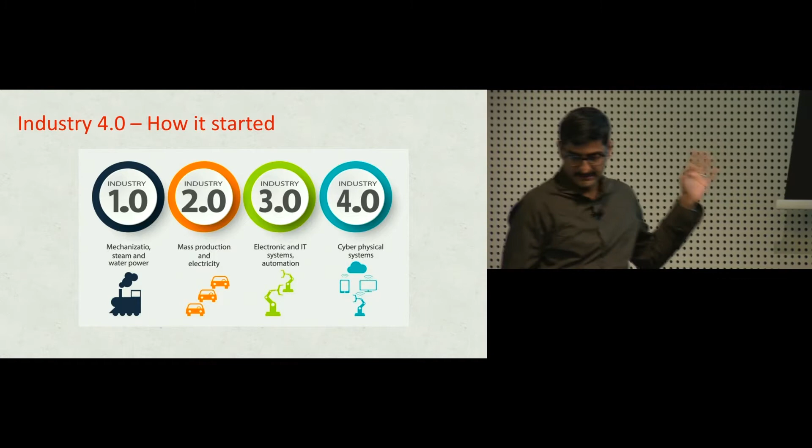Just a bit of background for some of you who may know this area, for others who may not. I work in what's called Industry 4.0. This is a term that came out from Siemens in Germany, but now it's taken over by pretty much any big manufacturing and automobile companies, and they're trying to build this all the way from 1.0 to where we are now at 4.0.

This is very relevant to all the talks you heard previously. This is thanks to digital data, getting data from every source, whether it comes from Alexa or Bing, and using this to produce more effective products. The example I normally give is: what if you can go online and order your shoes from Adidas with your name printed on the sole, and all this is done by machines talking to each other.

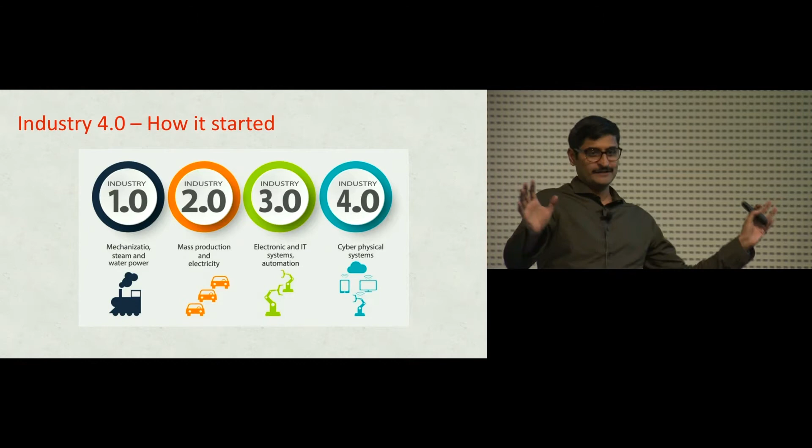There's no humans in between, right? That's kind of what Industry 4.0 is. We are still in the automation area, where you need someone to program the machines, tell it that's the sole, that's the color, you need to do that, and the machine starts to paint it. How do we then start connecting all this together?

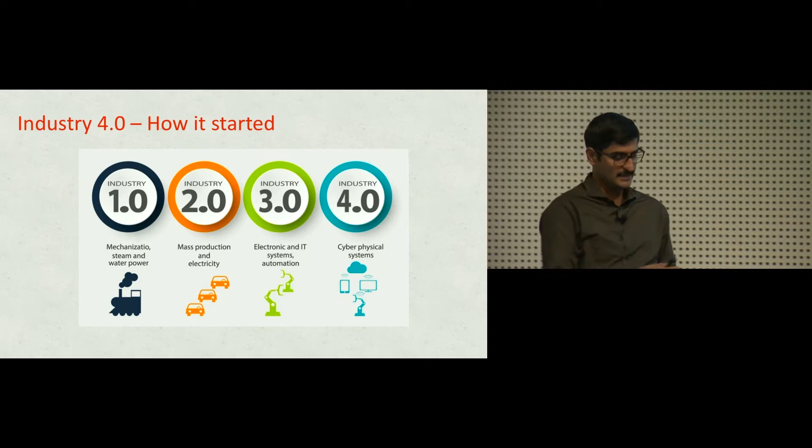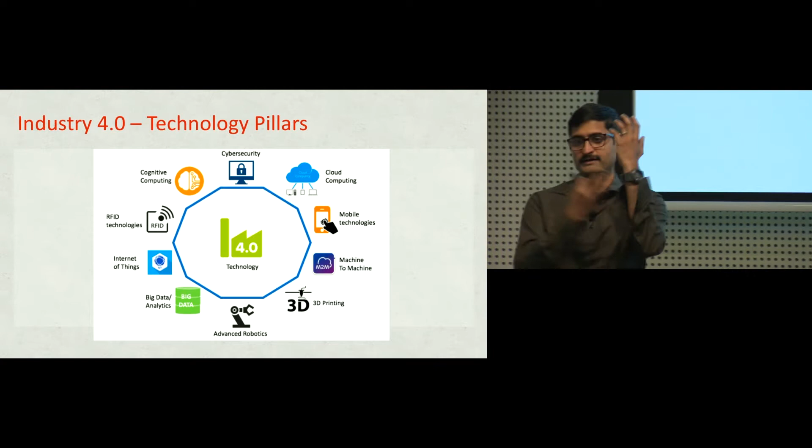What are all the technology pillars under this? You're probably familiar with everything. My area is more around the Internet of Things. This is about not just sensors, but your wearables, your smartphones, social media, data sources in digital form that we can use to generate insights in order to deliver an Industry 4.0 solution.

That leads me to what is called the Industrial Internet of Things, which is one of the key pillars of Industry 4.0. I picked this up because it's very important: these are numbers of how data from sensors, if used to produce 1% optimization, could lead to about $30 billion worth of fuel saved. In agriculture sector, it's about $2 billion.

I'm sure you're all familiar with smart agriculture, putting sensors on the field, understanding how the crop grows, identifying when to harvest. That's the age we are in. Yes, we have farmers, and they are the best who have the experience, but these technologies are helping them do these things much better and more effectively, thanks to changes in climate and a whole other factors.

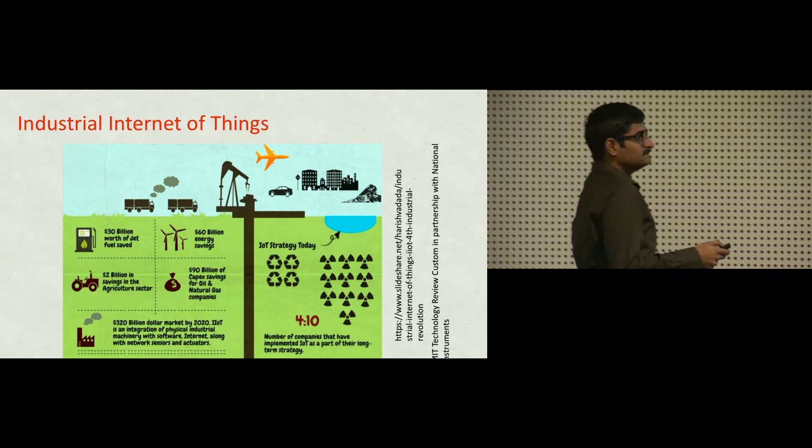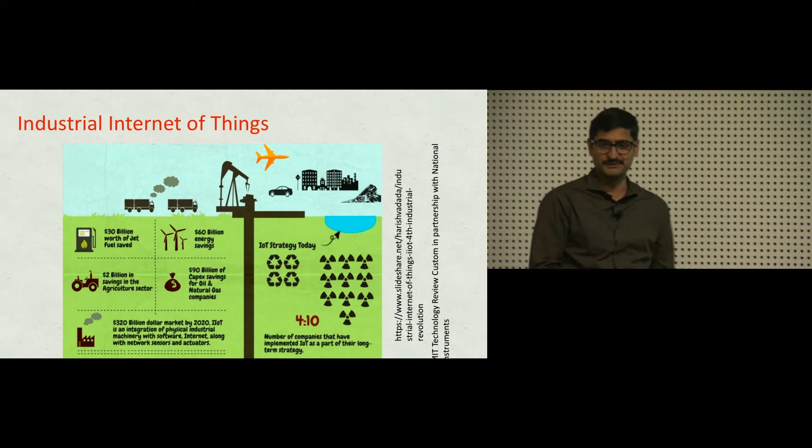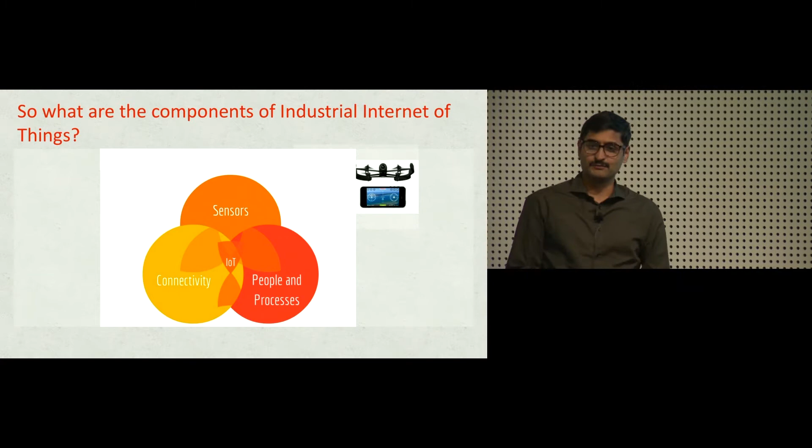In my view, some of the components of this, when we say IoT, the most common thing that comes to everyone's mind is sensors. But having worked with industry, what I found out is that when you want to have IoT or Industry 4.0, people and processes are very important.

Now, people coming from search or web searches, you all look for your users. For me, from a manufacturing point of view, people determine the processes of how to produce something. So before I do the cool machine learning and building models, I first need to understand the context of how this data is being produced. How do I fit the data?

Most industries in Australia, when they come to us, the first thing they say is, I have collected a lot of data, can you guys with some smarts try to do some analysis for us. Then we go to look at the data and we say, unfortunately half the data you have collected is useless because you've just been collecting data, you do not know how to use it.

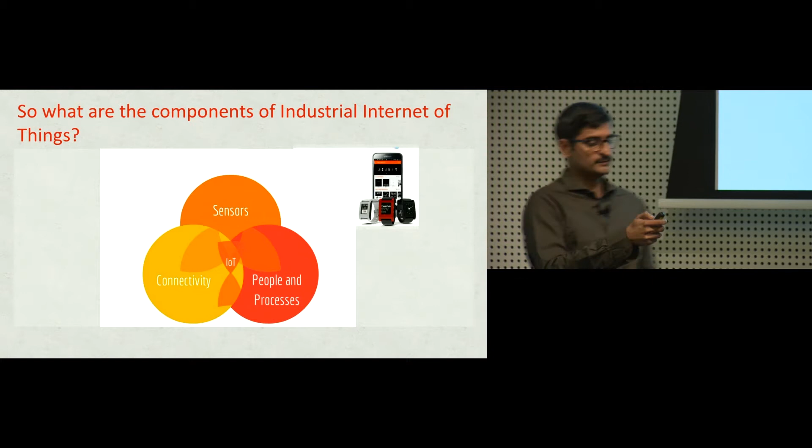We had to go back to the fundamentals: what does the data mean for you? What are the business problems where people are connected? Then comes the technology factor. I use this slide to motivate the fact that IoT is not just about getting some sensors, putting it in the plant, collecting data, doing some analysis, and you get a result. That's not IoT, that's one notion of it. Clearly it doesn't work in the real world in industry.

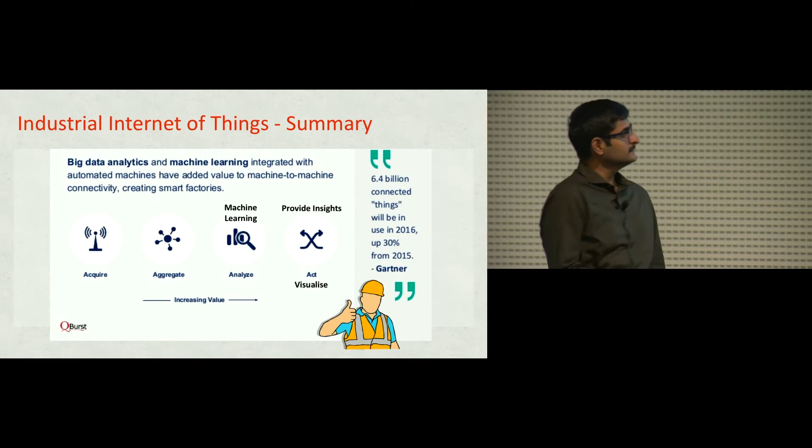So sort of the person in between all this acquiring data and aggregation. This was a study done by Cisco with Black & Decker in the US. When they went into the manufacturing plant and started looking at what are the top important things, as you can see, the actual sensors are the least important.

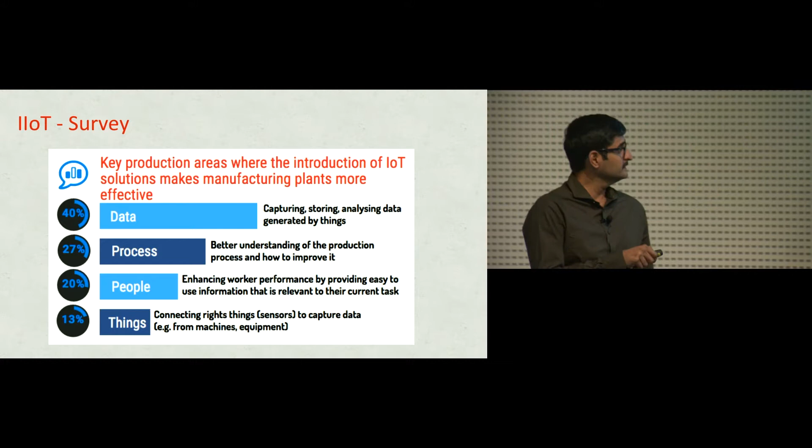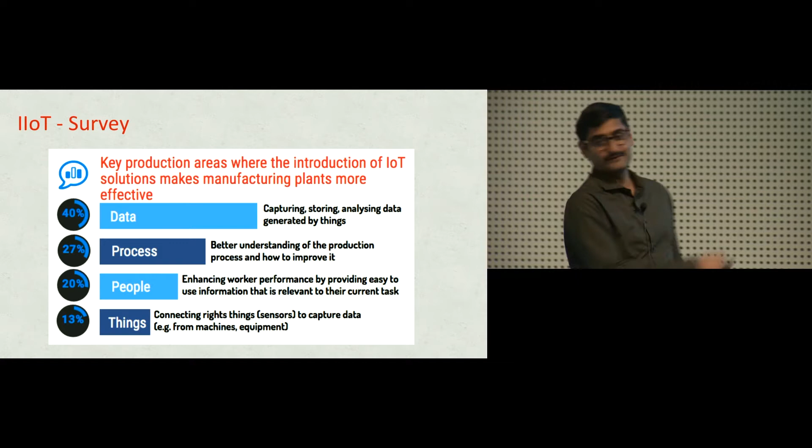Before working for Swinburne, I used to work for a company called CSIRO, Australia's premier research agency, like the NSF. They used to manufacture sensors about 6 years back for agriculture. A sensor used to cost about $2,500. Today, you can buy them off eBay for about $50. That's how fast the technology has grown, thanks to Moore's law. But these parts have not really changed a lot, they're still the same. That brings me to the actual work that we did.

This work was funded by AMPC, the Australian Meat Processor Corporation. This is a research development corporation funded by its members. There are about 20 different meat processing producers in Australia. They are end-to-end, meaning some of them own the farm, so they actually grow meat. And by the way, for vegetarians, yes, there's going to be some meat stuff here, so apologies, but no blood, okay? They kind of foresee what kind of research activities they need to conduct in order to improve the industry, provide better value.

Most of the money that they get goes into more pure science - what kind of new breed I can grow, what kind of food I can deliver them. This project came out because they wanted to look for an industrial IoT solution in a meat processing plant. This was sort of led by one of the IoT lab directors in Swinburne, Professor Dimitrios, and my other team members. So we took the idea of identifying what the opportunities were.

The approach we took was very consultative. We spoke to about 10 different meat processing producers in Australia, from Brisbane, Adelaide, Sydney, and Victoria. Through that, we went into a meat processing plant, and through consultations, we identified quite a few things. So that's how a meat processing plant looks like.

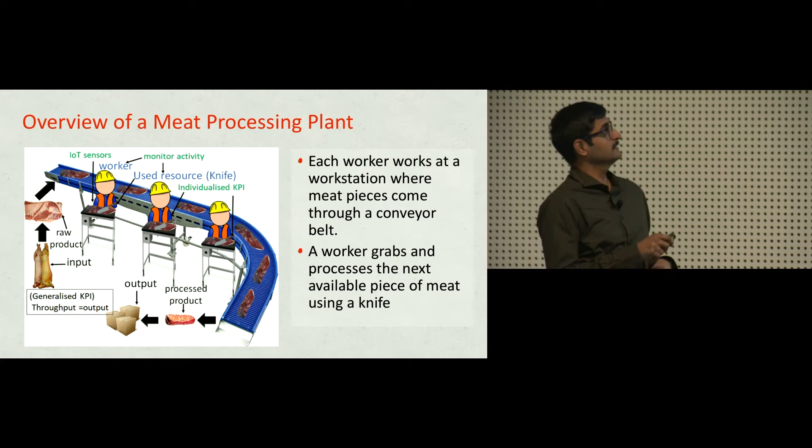Now, yeah, that's a very - I don't know how clear. I've got a real photo of it later on. But that's the level of automation they have - the best tool that they actually use is a knife. So that's a conveyor belt, and you've got meat going along. Someone takes it off onto a processing place, cuts it, slices it, removes fat, does whatever it is, and then produces a product which then goes into packing, which you actually go to your supermarket and buy.

Now, that's a very different experience to shopping in a supermarket. You get it very nice and packed. This is exactly what - now, they do have some automation technologies, things that can cut the actual carcass into different pieces based on an X-ray scan. But then the real stuff about producing the product, it's all manual.

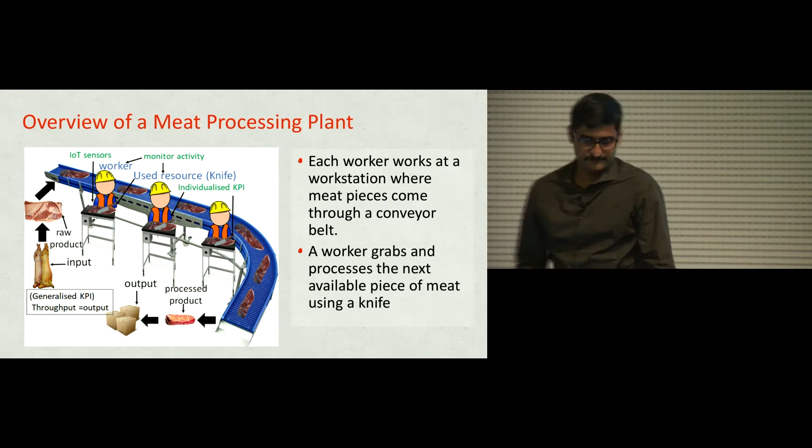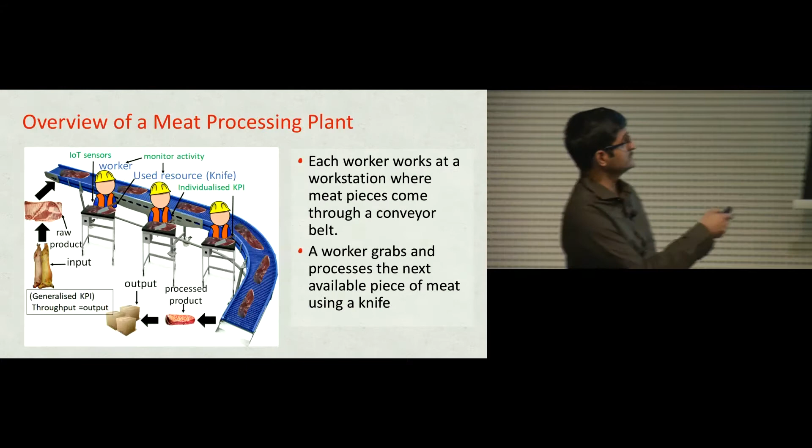So we were given the task of, given a scenario like this, the only KPIs they actually have is, I have carcasses coming in, I have products going out. Now, no one knows what's happening in between, which means today, I need to produce 500 pieces of rump steak. I need to process 1,000 pieces of carcass in order to produce that. My supervisor goes to each of these workers and says, you need to do this, get the meat, start doing it. If they don't finish work on time, let's do another extra hour of shift, or let's pass the shift on to the next person.

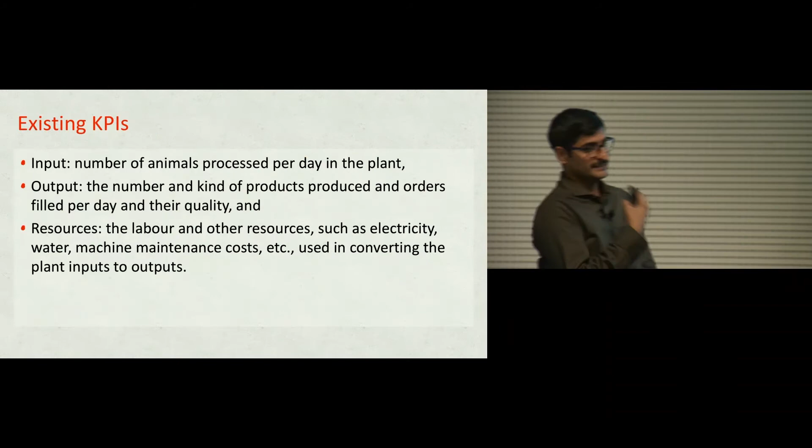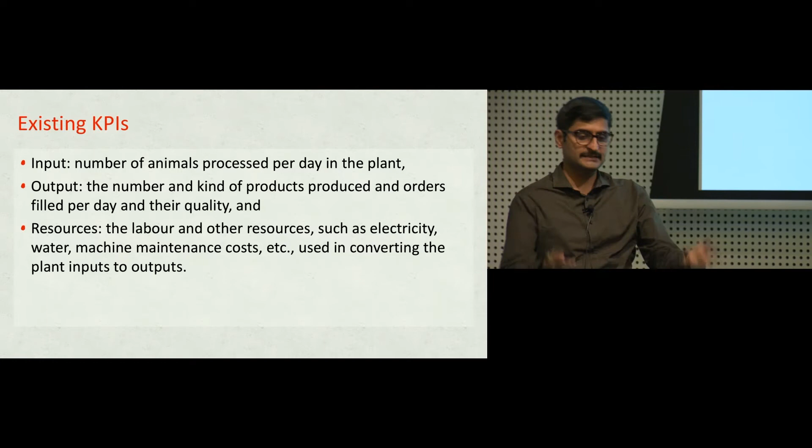And in this industry, it takes about 2 weeks for them to go back and look at any data to see if they were even meeting the quality standards. And that is one person going to 10 different machines, collecting data, putting it in an Excel sheet, and doing some analysis - and that's only the quality aspects of it. So we looked at this from a combination of consultation, our expertise in IoT, and also a bit of data science, and identified a few opportunities.

One was we challenged ourselves thinking, can we determine some sort of fine-grained KPIs? Rather than saying what goes in and what goes out, can we find out a bit more of who's doing what in between? Some of the other activities that some of you would have been aware of is what's called farm to fork. For example, go to your supermarket, buy a piece of meat, scan it on your phone.

It says exactly where the meat came from, which cow it is, which farm, which location, what did it eat. And this is getting very important these days.

You'll see work in traceability along blockchain, thanks to various sorts of disease that could get across and people could die because of that. In Melbourne, Australia, about a year back, we had a big problem with what I think was a fish-based infection.

It actually resulted in some people dying. So our work was looking at this key aspect of how do we use some sort of IoT technology to understand or provide a more fine-grained KPI.

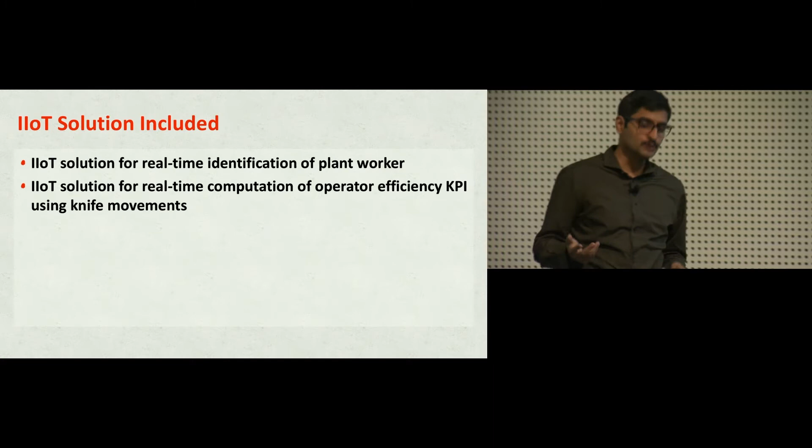So the solution we came up with: the only tool our operators in the industry use is a knife. So one guy came up and said, can you figure out if the knife is sharp or not? That's very important for them.

Because if you use a blunt knife - have any of you cooks here ever tried cutting a tomato with a blunt knife? If not, go home and try it. Just blunt it off and try cutting it.

You can actually hurt yourself if you're doing that for 6 hours. So one metric is: is it sharp? We started off with that approach, but ended up with a different objective. The only tool we had was a knife, so we were saying, how could we assess a worker's performance by the movement of the knife?

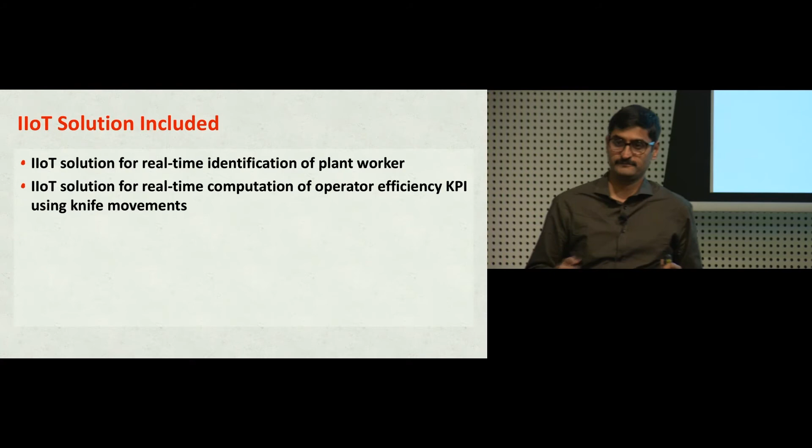Our system, we don't produce sensors, so we use off-the-shelf technologies. The sensors we used, we bought from the US from a company called MetaWear. It's about $50 US - proximity sensors, Raspberry Pis, everything off the shelf.

We built our own architecture where a worker wears this like an activity device on both hands, goes on cutting meat. We then use that to determine activity. So from a machine learning problem, it's recognizing activities - not somebody walking or sleeping, but using a knife to cut a piece of meat.

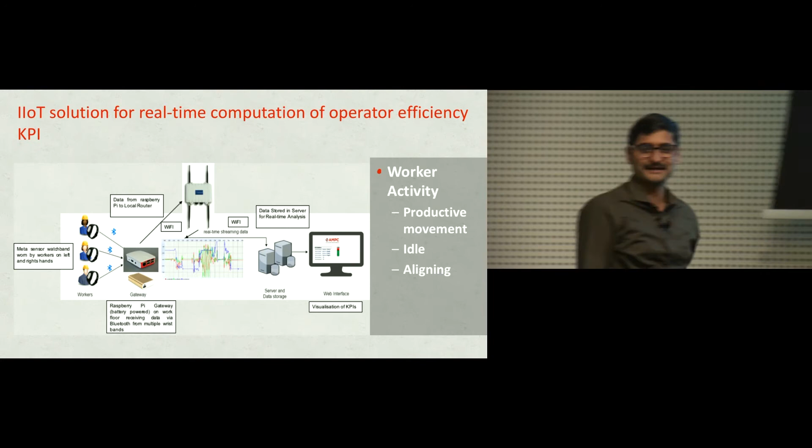This, you've probably seen much better diagrams of the architecture, but it's very straightforward. So we conducted a real trial to validate our study. Given it's research, university, limited budget, we could not go on for weeks of trial - this was about 2 days.

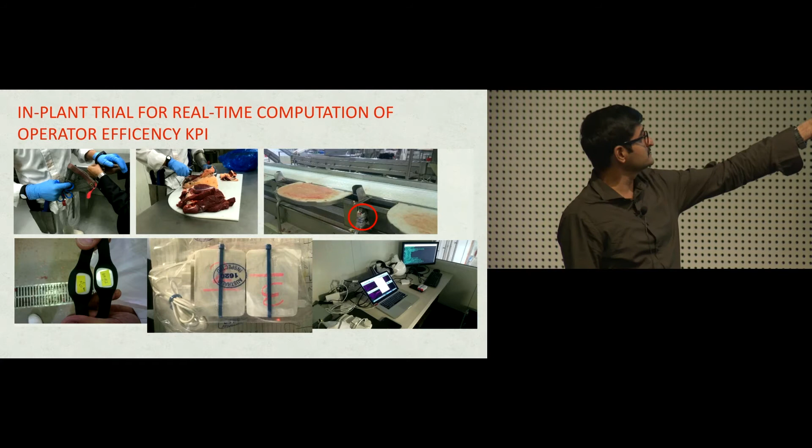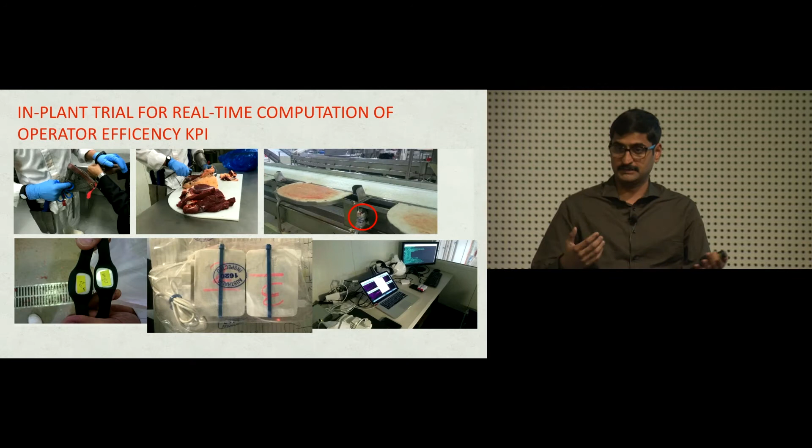What you see up here was done in a more controlled trial. This is a master butcher. In this, we had the liberty of giving the butcher a blunt knife, so we could actually see how the accelerometer or gyroscope data would differ from a sharp and a blunt knife. We have statistical evidence that they're really different.

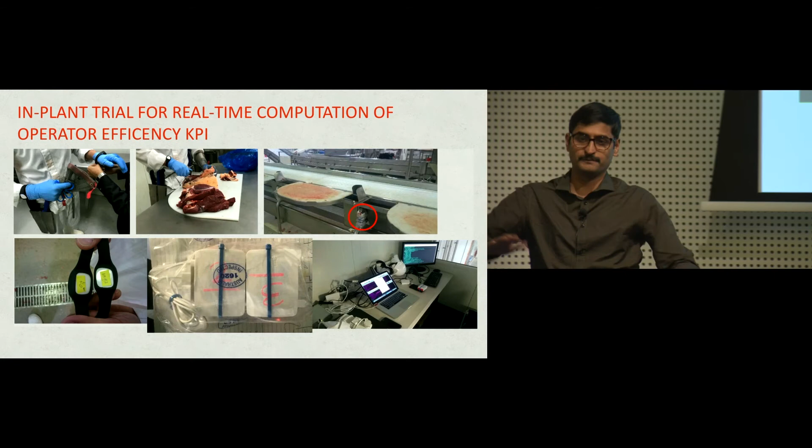But then when we went to the plant, it's a live production plant - they've got KPIs to meet. We can't give them a blunt knife because it's going to produce bad quality meat. We also found out that in our pre-trial this guy was actually slicing meat, but when we went to a real environment, they were removing fat - a totally different operation.

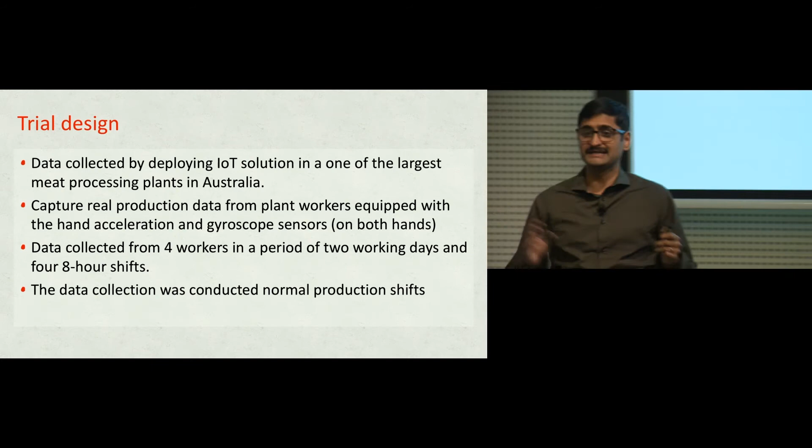Based on this, we ran this on 4 workers over 2 days across 4 different shifts, close to about 8 hours of data per day - about 16 hours of data that we were able to capture. Then we started building our models.

I'll probably quickly show you a video - just making sure if it's muted. That's good, okay.

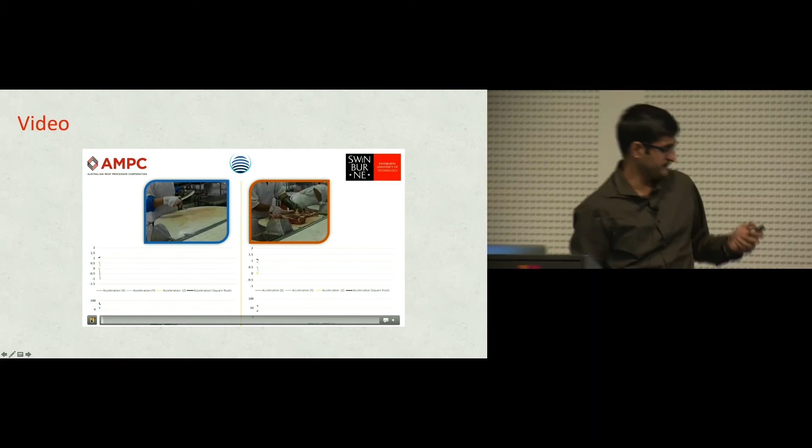So this is one activity called alignment, and all this is done by the person wearing this watch just under the glove there, while this person is doing a productive activity, which is, as you can see, removing fat from the meat, while this person is now idle.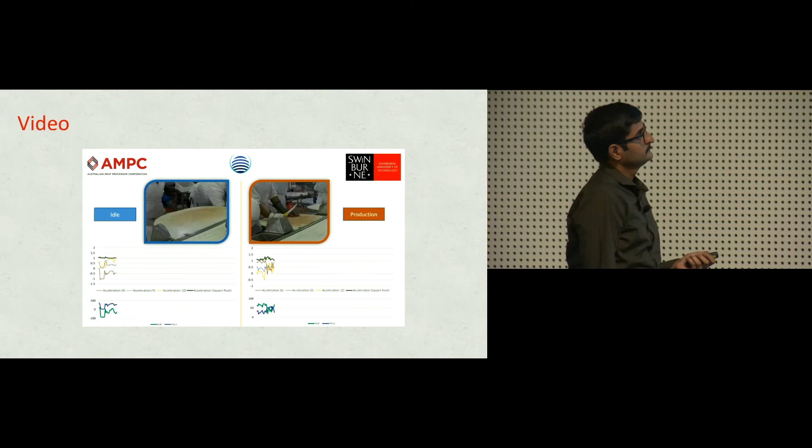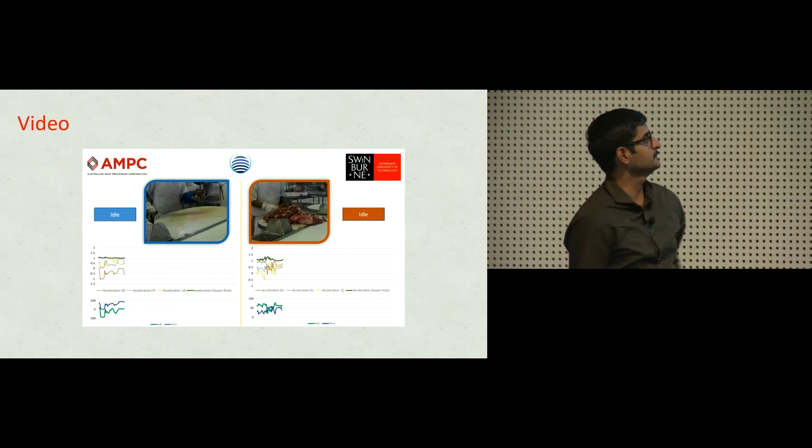Now he'll actually put it back in, and I'll tell you why later on. And this person will pick it up.

So what are the outcomes? The one on the left that you saw, that person is a more experienced worker. The one on the right was experienced, the left was an inexperienced worker, a trainee. That's exactly why the bigger piece of meat was given to the more experienced person, because the trainee might be wasting it.

Now, the outcome of this - you can see here, this was for 1 hour of data that we wanted to visualize. The experienced person was actually only working 60% of the time. I call these active states, because if you look at a typical ML model, you've got these 3 states and we count how many times they are being productive. He produces about 49 pieces of meat in almost half the time of this other person, who was working for almost 90% of the time but producing about 30 pieces of meat.

Now there's one aspect here that requires a bit more technology, which we're now trying to do another trial with them: the quality of the output.

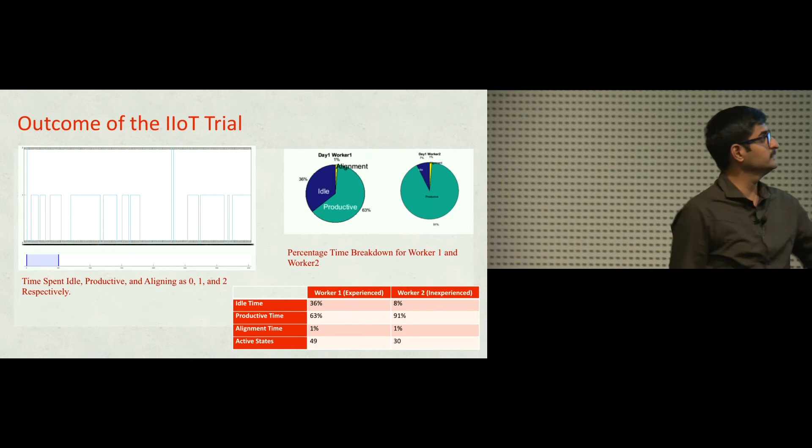This is only the speed at which they're doing, it's called throughput. It doesn't mean the quality is always high. But what this essentially means is this person has a much higher risk of being injured, because he's putting a lot of effort when working almost 90% of the time. Hence, this industry's cost of injuries to wrists and muscles is around $100,000.

So the most important thing is they want to help them with better training, right? Take them off the plant and give them more training.

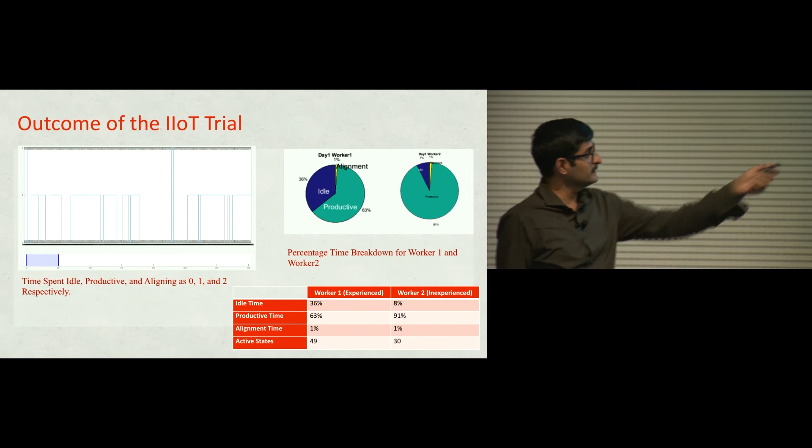Another big outcome was, until we did the project, they had no insight of such data at all. All they knew was something comes in, something goes out. Now with this, you can imagine if it's a conveyor belt, your line is only as fast as the slowest person on the line, which means you can now reorder your workers to have much higher productivity.

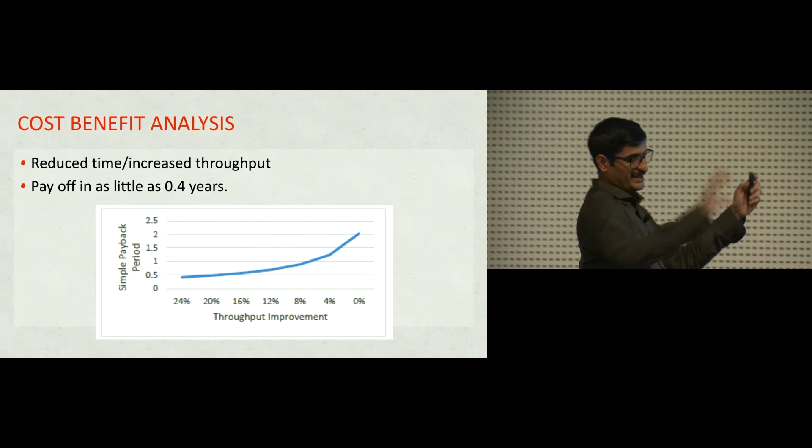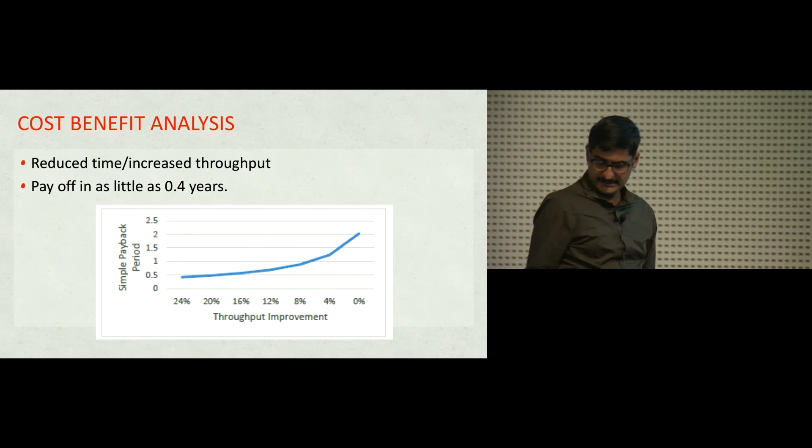Now we did a quick payback based on off-the-shelf hardware. We are not into the commercial stream because we are a university, but we had another company who partnered with us, and they did some quick work. In terms of throughput improvement, if we are able to reach around 25%, it's half a year payback.

And this was for a factory which had about 400 people. So it was costed for about 400 people, having the watches, the infrastructure installed, and also some software being developed for them and maintained for about 3 years.

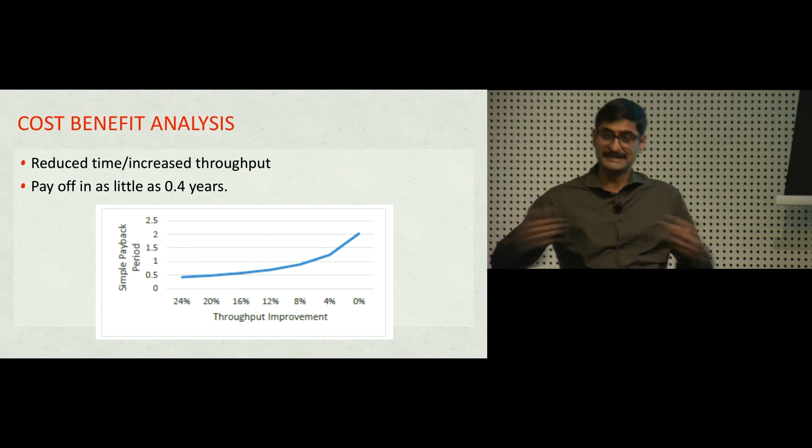Now that the other part is done, because we're academics and we had access to data and some video, what we ended up doing was we thought, okay, we've got 3 activities that we classified from the project point of view. Could we actually go and identify more activities with the same data?

So we went to a set of about 7 different activities: slicing, cutting, pulling, reaching, and feeling. Now, these are our own definitions of some of this, which we verified with what the industry uses to define some of these activities.

We used stock SVM models, about 43 features from acceleration, 32 from gyroscope, anything from mean standard deviation to acceleration. In some cases, we considered scenarios where the worker actually had the watch on both hands, considering both the working hand and the other hand, because in some cases when they're holding the meat, that hand is more still, which increases the accuracy of the overall solution.

We also tested this by creating different SVM models. Stock SVM, we did not upgrade the model. We trained it per worker, trained it across workers, and picked a sample from each worker to do a cross-model verification as well.

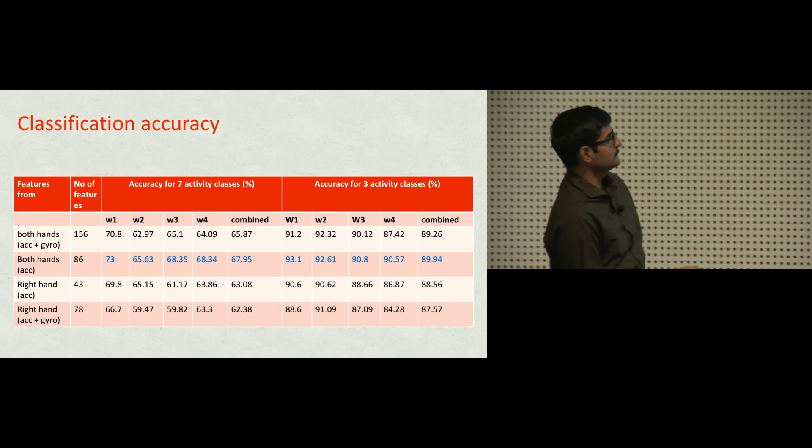And I guess that gives us, with 3 activities, because it's far easier with this, we were about 90% accurate in determining what was actually happening in the scenario. But then when we started going into depth trying to determine 7 different activities, we were around the 65-70% mark.

But again, when we went into this trial, we did not expect to have this many activities at all. It was really just looking at the data, we looked at it and said, okay, can we try doing something with it? And that's pretty much what we did. So it probably brings me to the end of my talk. Thank you very much, any questions and feedback?

Yes. Thanks for the interesting talk.

I'm wondering if you have used supervised approaches for your recognized activities, or something semi-supervised or unsupervised. It's all supervised, so we use SVMs, we had to train it with all. Some of this data, we were able to collect video of the workers from the plant, so we used that to annotate all our data streams to prepare our training data set.

And then we trained the SVM models. All we did was train the model either from one worker and try to determine all the activities of other workers, or combine the data from multiple workers to create our training data set. So we tried these combinations, and that was the accuracy I showed you before.